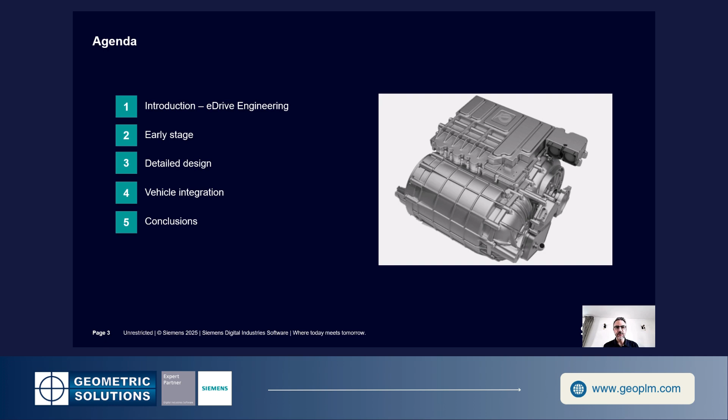Let's start with an introduction. Looking at the high-level challenges of eDrive engineering, NVH comes as one of the first points. Electric drives are not silent and have very specific noise characteristics, higher frequencies due to the construction of the electric motor and the transmission, tonal content, and phenomena such as the switching frequencies from the inverter can be very annoying, despite the fact that the overall levels of the e-powertrain are limited compared to traditional powertrains.

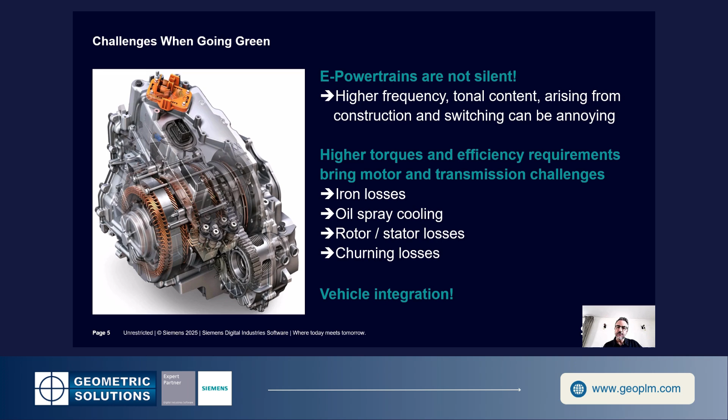Of course, there is a lot of other challenges in terms of performance and in terms of thermal management, how to deal with all the losses. And of course, vehicle integration is also very important. We would like in this webinar to go beyond just NVH, but also show how can we deal with NVH, considering also the other attributes like performance and thermal. How do we manage the need to deal with all these attributes?

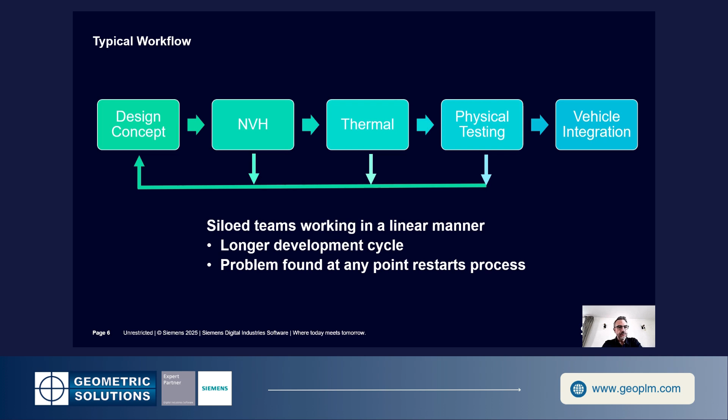Looking at the traditional development process, what we still see a lot in companies is the trend to have siloed teams, separated teams dealing with the different attributes of the vehicle, dealing with NVH, dealing with thermal, dealing with physical testing and with vehicle integration. That is not ideal because it leads to a longer development cycle, and also the fact that we solve an issue for one attribute can create a problem on another attribute if not done carefully, and this all leads to a lot more iterations in the design.

What we propose here is an integrated development process or workflow, which allows to deal with all of these attributes together. The idea is to keep consistency through the development cycle between these attributes, have the ability to assess each of these performances as early as possible, and allow teams to work in parallel and together, shortening the development cycle overall. This is what we refer to as multi-attribute balancing.

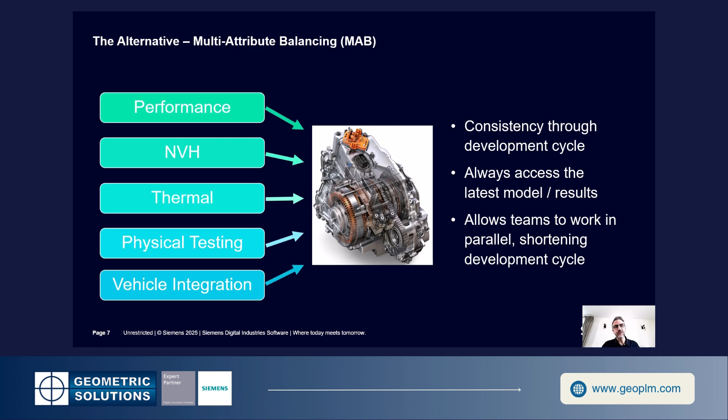And then the integration and the control validation, the V&V steps. What we see above is more the eDrive design process, the product lifecycle management aspect, how do we define the requirements and how do we develop the eDrive system by looking at all these attributes and also integrate it with the requirements that we can track along the development cycle until the final verification and validation of the product.

So this offers a framework in which the simulation and testing activities are well integrated with the product design, and we can leverage simulation and testing as much as possible along the development cycle. We will use this framework to go through the eDrive NVH development journey.

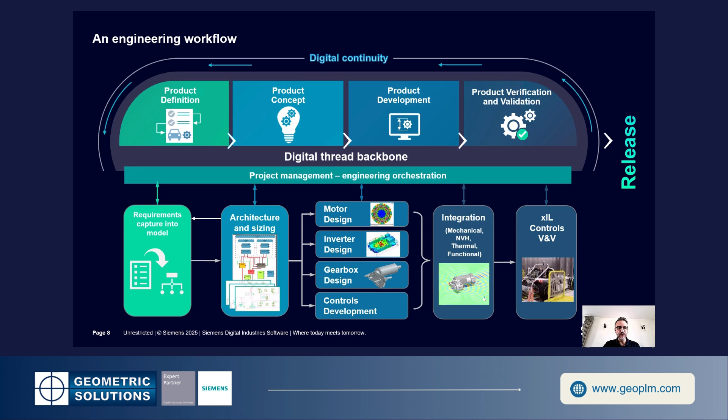But first, let's look at the main challenges a little bit more into detail. The challenge of the NVH engineer. Overall levels are lower, but as discussed before, we have these high frequency signals due to the e-motor construction or the transmission and the gear interactions.

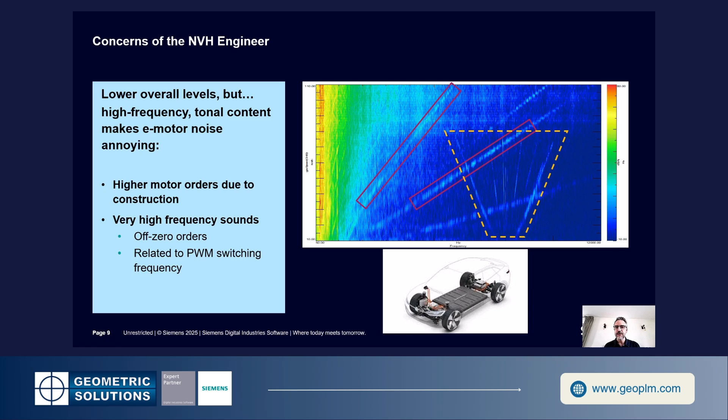And we have also quite specific phenomena like this switching noise from the inverter, which leads to off-zero orders, like we can see here. So very specific noise phenomena, which are also very annoying because it's about high frequencies and very specific signatures. So although we have lower overall level, we have to deal with these phenomena, and we have to make sure that these noise signatures stay below, let's say, the level of road noise or aerodynamic noises.

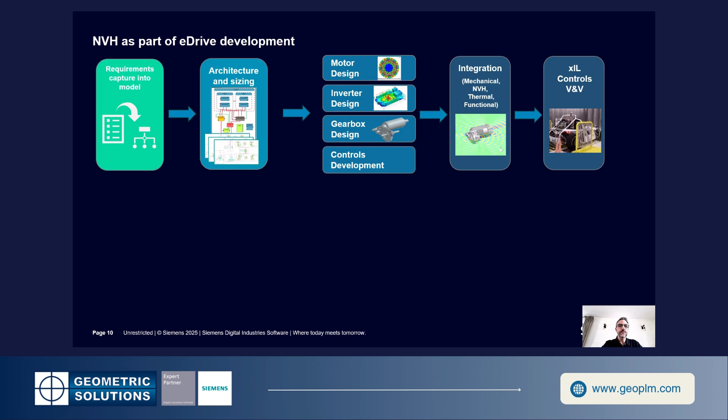If we look in more detail into the development cycle, we go through different phases, looking in particular at NVH. First, the requirements need to be defined at the vehicle level in terms of NVH. This can be done by looking at predecessor vehicles, by competitor benchmarking, activities which we also do in our engineering services team.

Starting from that, we go through the concept definition of the electric drive. At the concept stage, we define the architecture of the system, the transmission layout, the type of e-motor and construction. So already in that early phase, we can perform some NVH analysis in order to understand the impact of design decisions on NVH.

In the detailed design stage, for each component - the e-motor, the inverter, the gearbox - we do more and more detailed predictions as more details on the construction become available. So we can start optimizing the NVH while keeping performance and thermal on target.

For the gears, especially the gear geometry and microgeometry are being defined, and we are also looking at the gearbox housing, how to make sure that it is not going to create a high noise level or amplify the excitations into high noise levels.

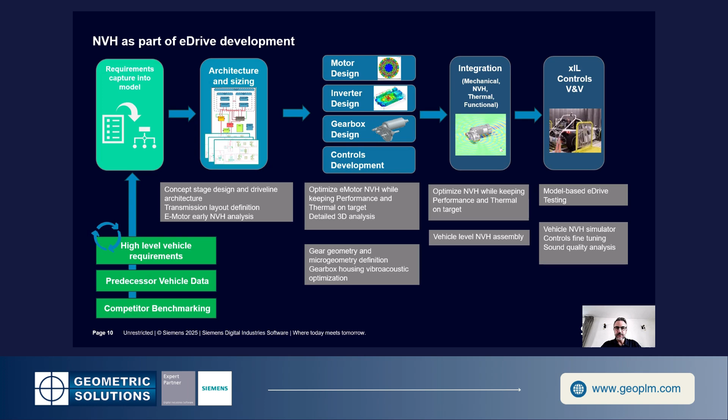So let's start looking at the simulation in early stage, in particular for the electric motor. What we propose here is a systems engineering approach, but for the NVH performance.

The electric machine noise and vibration app, which we call the eNoise app, is an application within our systems engineering software Simcenter Amesim, which deals with the NVH performance of the electric drive. It allows, in a systems engineering environment, to create a model of the e-drive and to integrate there also its vibroacoustic performance.

Typically in the early design stage, we don't have much detail about the construction. Maybe we have the type of motor, a first idea of the geometry, the number of poles, and the basic design of the electric machine.

This will allow us to predict the electromagnetic loads, or the B fields, in the air gaps. We then use some basic assumptions about the structural parameters of the electric machine in order to predict the noise radiated from these electromagnetic excitations.

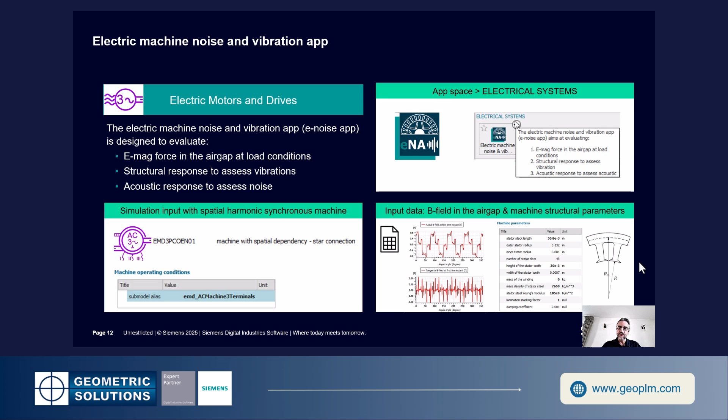The process looks like this. First, we have a pre-processing step where we create what we call reduced order models, typically using 2D electromagnetic FE simulation. We create maps of these B fields, or magnetic fields, in the air gaps under different conditions, with different torques, for instance.

This is the data which we use as input to our systems engineering software and simulation. We use these loads and combine them with our analytical, structural, and acoustic models in order to come up with order cuts with system level NVH predictions.

There is a possibility to replace the analytical model by a more detailed FE model. This is what we call vibration synthesis, which is typically only possible in later stages of the development. We'll come back to that later in the presentation.

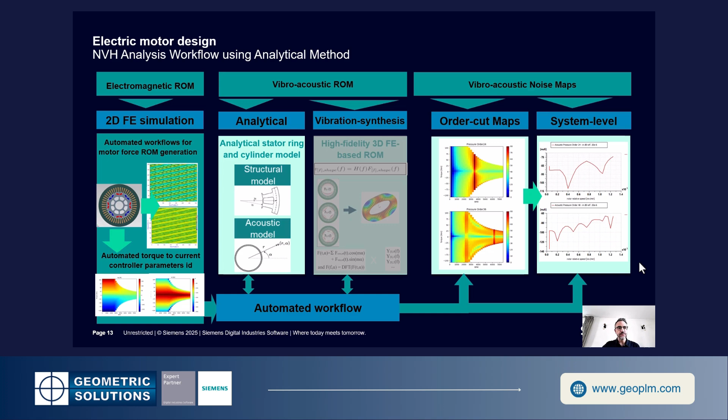An example here: we use this system simulation capability to evaluate the effect of controls on NVH, in particular for the pulse width modulation, the switching noise frequency from the inverter. We have our inverter model here, the controls defined as an input, and this is all integrated in a full vehicle model, a basic full vehicle model.

Here we see, for instance, an A to B comparison about the impact of control strategy on the NVH. Basically, we try to spread the frequency content of the excitation and avoid pure tonal excitations. Through this method, we see that we managed to reduce the peaks in the response, which is very positive.

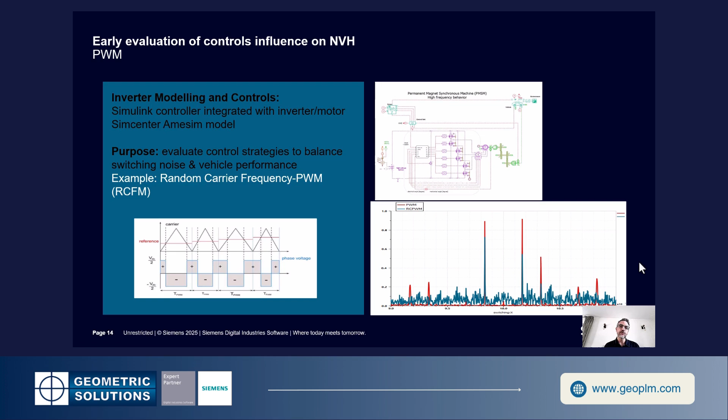But on the other hand, we also see that the background is more important - we have an excitation across the frequency range, which leads to this background noise. So the message we want to give is that it is possible, in early stage, to already assess the impact of the control strategy on the NVH.

Now we will discuss the transmission part, and Jonas will go through this simulation capability on the early stage for transmission.

Yes, thank you Francois. So I'll talk about NVH performance engineering in early stage, focused on the transmission. Before I do, I want to take a step back and first talk about the typical challenges we see in the area of transmission engineering.

First of all, NVH engineering has a limited influence on design. Typically NVH performance prediction and validation is done later in the development cycle, which means engineers only have design responsibility on housing geometry, bearings, or gear micro geometry. But if you would like to optimize NVH performance, you typically also need to change the transmission design itself.

Secondly, we know that system compliance will have a big impact on gear contact detection and therefore also on NVH performance. So how do we consider that coupled effect between the gear contact detection and the full transmission system level effects?

Also, when optimizing transmissions for best NVH performance, it will affect strength and durability performance attributes, so you need to make sure that once you optimize your transmission, it also meets these other performance attributes. Finally, you would like to optimize transmissions for driving at slow speeds in city environments and at high speeds on the highway, meaning you need to optimize your transmission for a broad range of operating conditions.

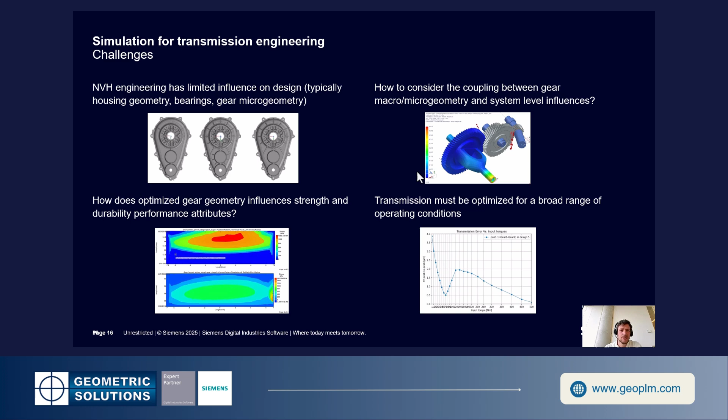So what is the traditional process we see today for transmission engineering, especially early in the concept stage? Typically you start from your transmission requirements, which can be the desired gear ratio, the desired power conditions, and the available space, and then you optimize the transmission for certain targets on durability, strength, efficiency, and NVH.

The first step is optimizing the layout, meaning optimizing the positions of the shafts, gears, bearings, and their corresponding dimensions. Once you have your layout fixed, you go into bearing selection, bearing optimization, and bearing rating. Then finally, similar for gears, you start to optimize both macro and micro geometry and evaluate the different performance metrics.

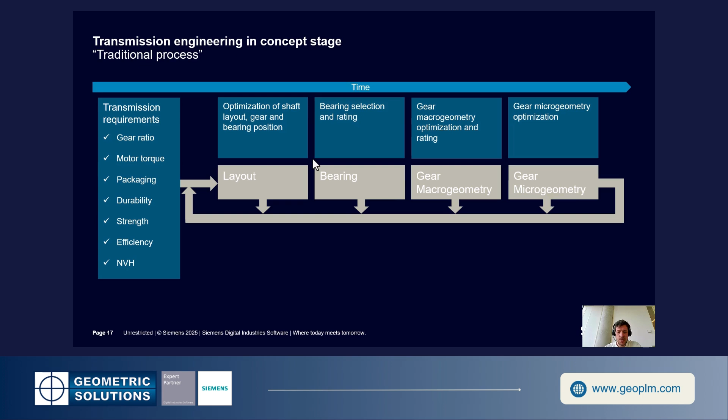But as you can see from this process, it requires many iterations and optimizations, typically at subsystem level, which means it's not only a very intensive manual approach but also very time consuming. Even more importantly, if you optimize at the subsystem level, it doesn't necessarily mean that you find the overall optimum design.

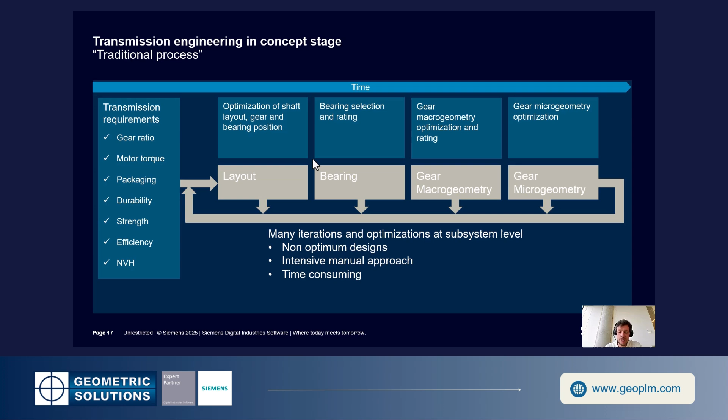That is why with SimCenter tools we would like to propose an alternative approach, where you also start from your layout and bearing optimization, but then use a systematic approach to optimize both gear macro and micro geometry at the same time. The advantage is that you have a systematic or automated approach to find the global optimum design, while considering your full transmission system level behavior.

Again, it's important that you take into account the influence of the transmission and housing compliance on the gear contact detection when optimizing your gear geometry.

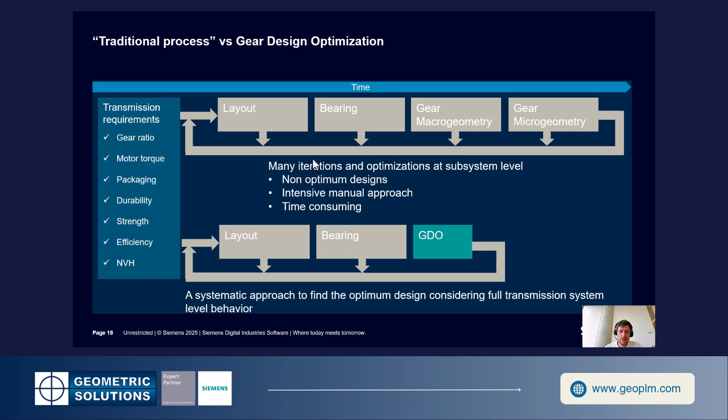So our colleagues from the services organization also developed a process to perform this layout optimization using SimCenter tools, more specifically SimCenter HEEDS and SimCenter 3D Motion. Here the target is to optimize your layout or topology for minimized mass and minimized misalignment variability.

Why misalignment variability? Because it's a good indicator or strategy for later optimizing the microgeometry. If you minimize the variation of misalignment as a function of torque, it typically also means you can optimize your microgeometry across a wide range of torque conditions.

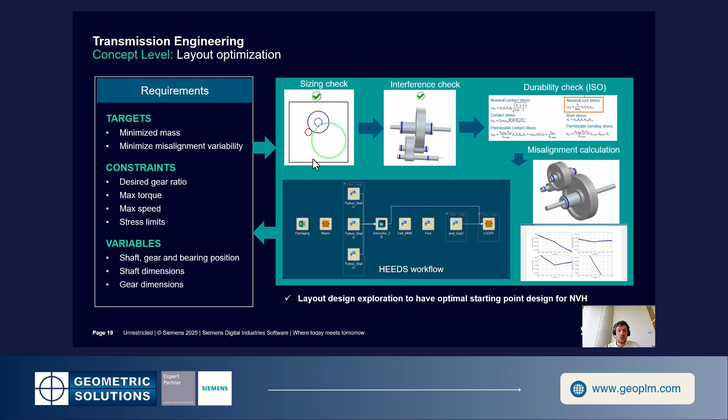What is the input? Typically your gear requirements, like gear ratio, max torque, max speed, and also constraints on stress, etc. What is the outcome, or what are the variables? It's the design parameters related to positioning and layout optimization—the shaft, gear, and bearing positions together with the shaft and gear dimensions. So a good layout is basically the starting point for a good transmission NVH optimization.

I've already talked about gear design optimization. It's really a framework leveraging SimCenter 3D motion and SimCenter HEEDS to optimize gear macro and microgeometry in terms of different KPIs, such as durability, efficiency, and NVH.

The key here is that you really consider a sophisticated optimization algorithm to optimize your transmission within a minimum evaluation time. Why is this important? For example, let's consider a two-stage lay shaft transmission, which is very common for EV passenger cars today. If you only consider those two gear pairs, we're already talking about more than 100 design parameters. So if you would like to find an optimum design for such a large design space, you really need a robust, efficient algorithm to find that optimum design within a minimum evaluation time.

Also very important is that when you optimize your gear macro and microgeometry, you consider those system level influences. What is the influence of the compliance, the deflection, and therefore misalignment on your gear contact behavior? And secondly, you would also like to consider multiple operating conditions, which typically means multi-torque conditions.

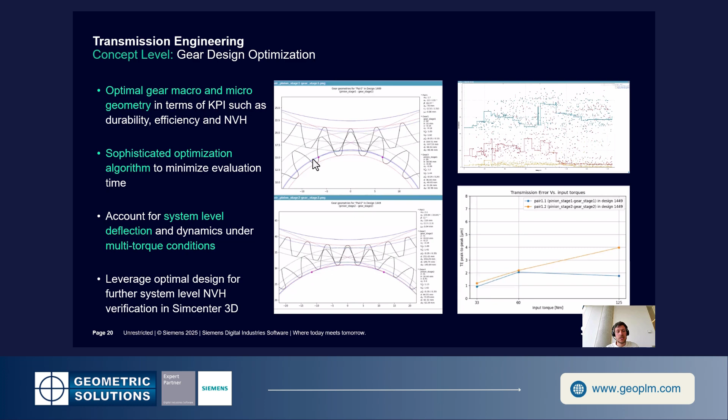So what does the typical process look like when we talk about gear design optimization? Targets are more NVH-focused, where we would like to minimize your peak-to-peak transmission error, for example, or minimize your bearing force harmonics. The input is typically that layout optimized from that first part, and then constraints on max torque, max speed, and constraints on stress, strength, and durability.

The variables here are really your gear macro and microgeometry variables. So, of course, the goal is to optimize the gear geometry for best NVH performance, but at the same time making sure you also meet criteria on root stress, contact stresses, flash temperatures - the strength, durability, and efficiency type of KPIs.

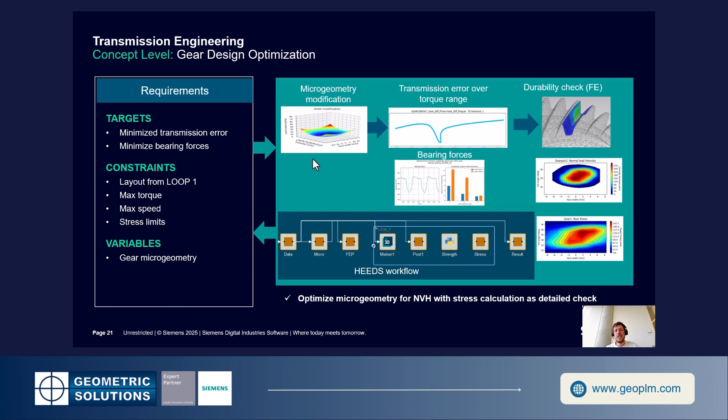And with that, I'll give the word back to Francois. Thank you, Jonas. Let's now get back to our agenda.

We are going now to focus on the detailed design phase. In this phase, we are able to do much more detailed simulations in order to understand the NVH performance of the electric motor, the inverter, and the gearbox in much more detail, and also continue assessing the effect from controls.

The key will be to optimize the e-motor NVH while keeping performance and thermal on target, in our effort to ensure multi-attribute balancing. We will also go into more detail in the definition of gear geometry and microgeometry, and start optimizing the housing of the gearbox.

So the process for a detailed analysis of e-motor NVH looks as follows. In the first step, we need to identify the loads by means of a 2D or 3D electromagnetic FE model. We will characterize the magnetic field and the loads which are applied to the stator of the e-motor.

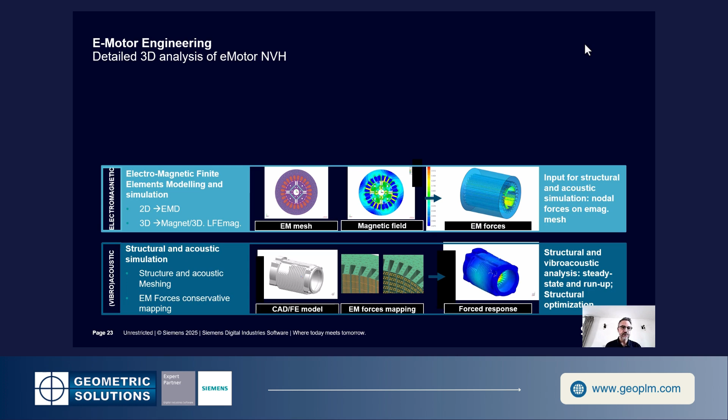In addition to that, it remains possible to understand the effect from controls on the NVH performance. In this example, we are using an AMESim system level model of the e-motor, in which we can input different inverter current waveforms as input for the electromagnetic simulation. So we are closing the loop with the controls.

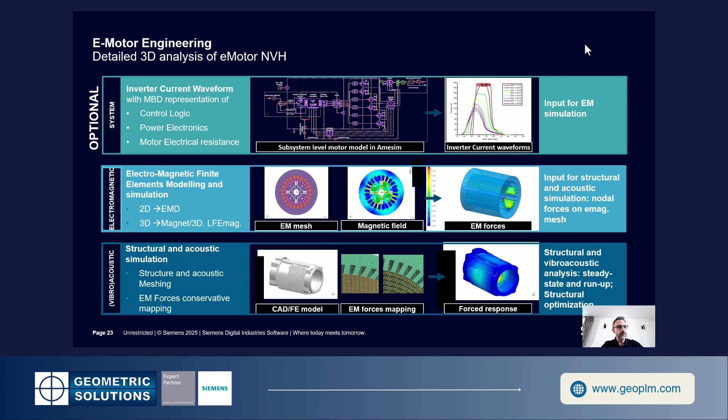Besides these very detailed calculations, one of the difficulties to deal with is calculation time, because we are talking about quite large models.

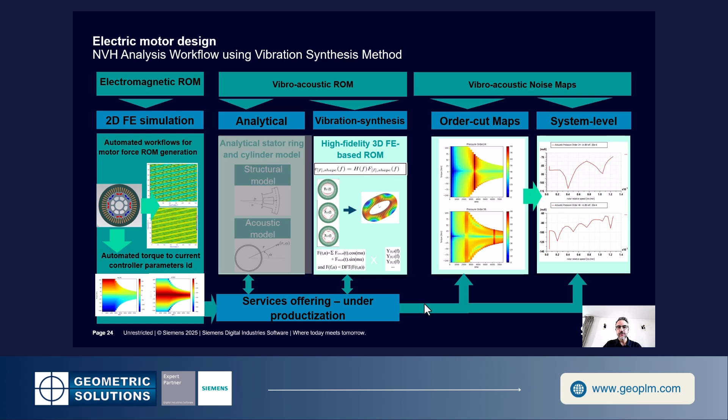In this case, we can propose our eNoise app as a solution, in particular the so-called vibration synthesis method. In this method, we reduce the FE representation of the structure by means of a reduced order model, allowing much faster predictions. We first need to pre-process the information to identify basic mode shapes from the e-motor structure, then calculate the response as a superposition of these basic mode shapes. This allows us to use the same approach described before with a more realistic representation of the structure instead of an analytical model. This is currently an option offered by our services, and coming up in our Simcenter 3D product.

Here are some other considerations. The eDrive engineer will look for options to optimize performance, and for instance, skewing of the e-motor or notching strategies can be used to optimize performance, but they also have an impact on NVH. So these are important parameters to take into account.

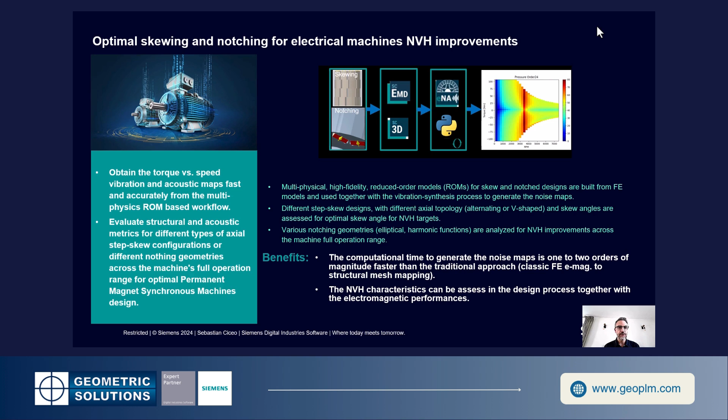In this overview, we show the possibility to evaluate the effect of skewing or notching strategies on NVH performance by using our eNoise app. This allows a quite fast prediction and understanding of the impact of skewing and notching, and we're able to assess not only how they affect performance, but also how they affect the NVH of the e-motor.

Now, still looking at the need to come up with a well-balanced design, which will lead to good performance from a thermal viewpoint, a durability viewpoint, and an NVH viewpoint, this is an example of a workflow we can propose to do this optimization and properly take into account the different attributes. Our engineering services team supports customers to implement and deploy our Simcenter simulation solutions into a workflow suited to the customer's organization or process.

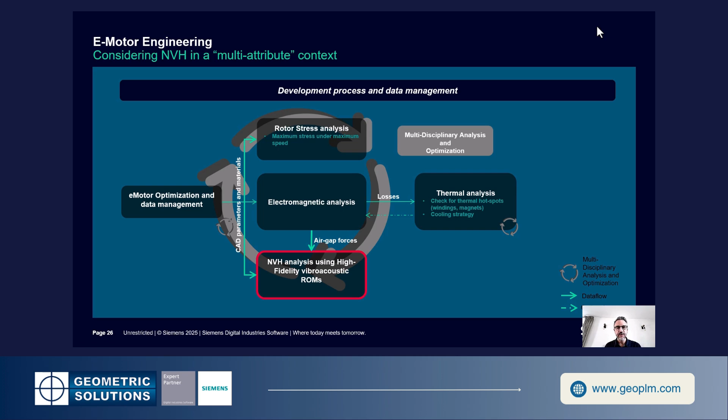In this case, for instance, assessing the electromagnetic performance, calculating the NVH, assessing the rotor stress, and then checking the thermal performance, iterating through this process until we come up with a balanced design. So here, the key is multidisciplinary analysis and optimization. We are using, for instance, HEEDS as an optimizer to realize this workflow.

Looking at transmission NVH, also in this detailed design stage, we can look much more in detail at the impact of the construction on NVH. For instance, we can capture the coupling between system level dynamics and the deformation on the shaft on the gear contact. We're able to consider the influence of damping.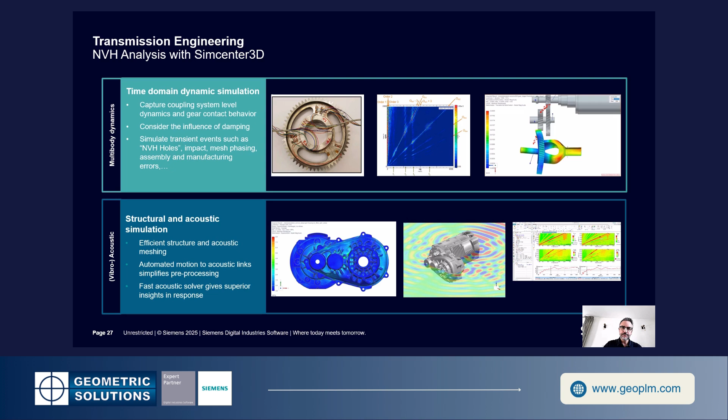Let's now go to the last part of the webinar, where we will discuss integration issues, still looking at NVH as one of the performances to manage. We'll look into performance at the vehicle level, and also introduce some more testing capabilities, including model-based e-drive testing, and how we can implement these in a simulator.

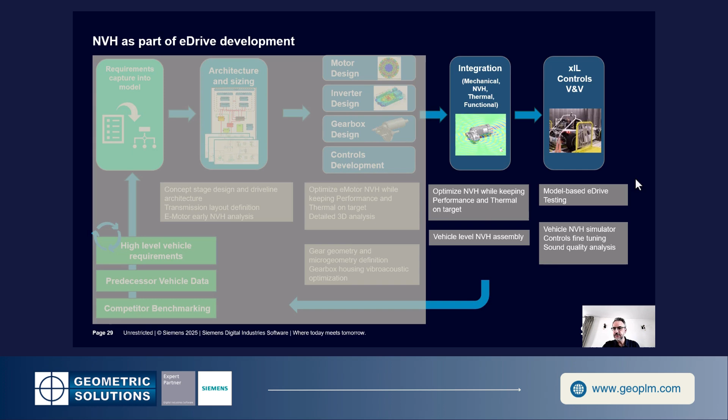The idea of analyzing the integration of the eDrive in the vehicle is the following: we use the source transfer receiver model. The idea is that at each stage of development, whether you are an OEM or supplier, you can have a view about the full vehicle performance. The source representation as well as the transfer in the vehicle can both be represented either by testing or by simulation, and then the system allows us to understand the response at vehicle level.

There are a few technological considerations, in particular on how to represent the source and in which boundary conditions, in order to avoid evaluating the source with different boundary conditions than in the vehicle, which would give an incorrect response. For that, we use blocked forces, which allow an invariant representation of the excitation, and then combine it with the transfer function at the vehicle level.

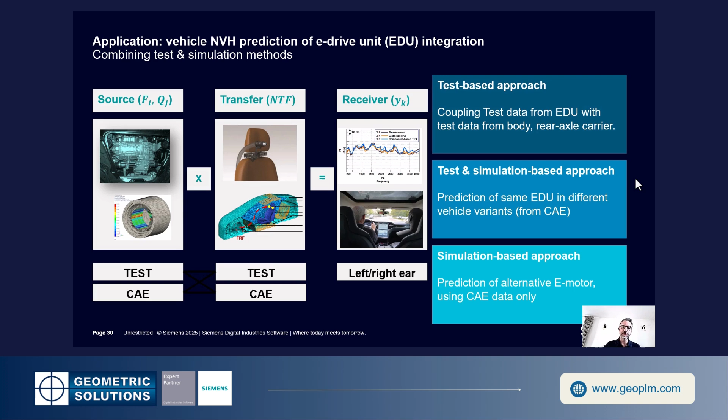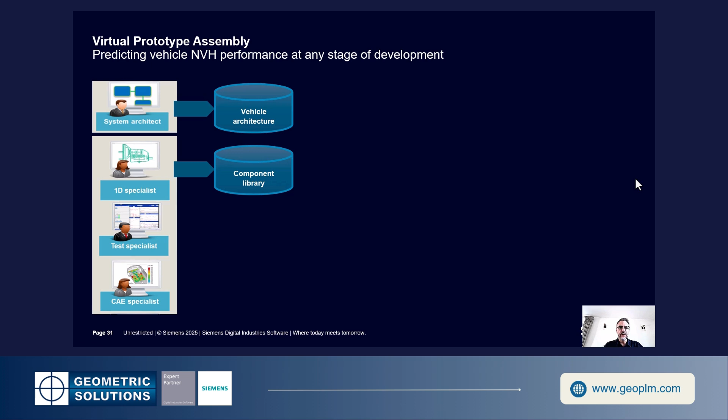This approach is available in our virtual prototype assembly tool. The idea of virtual prototype assembly is to put the different parts of the organization together in order to have the right data to be able to predict the NVH performance, and that also includes collaboration with the suppliers.

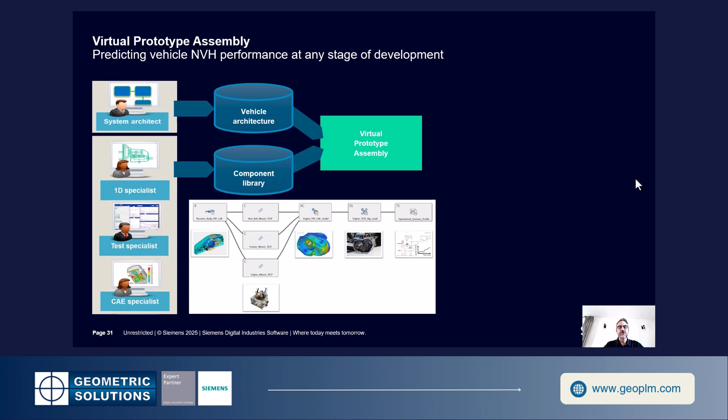The specialists will create a library of components which are integrated in the vehicle, and the assembly is done in the virtual prototype assembly, or VPA, tool in Simcenter Testlab, which can then be used by analysts to analyze the response, to analyze the contributions, to assess sound quality, but also this data can be used inside NVH simulator to assess the effect of control strategy.

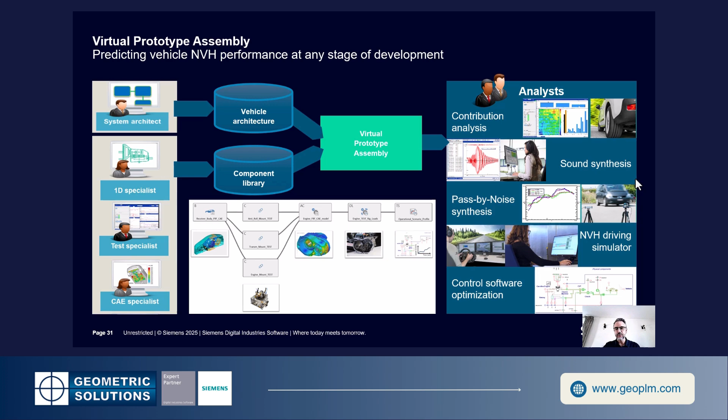Here you find some examples of typical data sources in order to populate this virtual prototype assembly. We will define accurate components, using a library of components from simulation and/or from testing. For instance, Testlab data, SimCenter 3D, Simcenter Amesim can be used, as well as external data from other software.

Once these component models are created, they are selected for the specific architecture, and then the assembly is done and we can post-process the results.

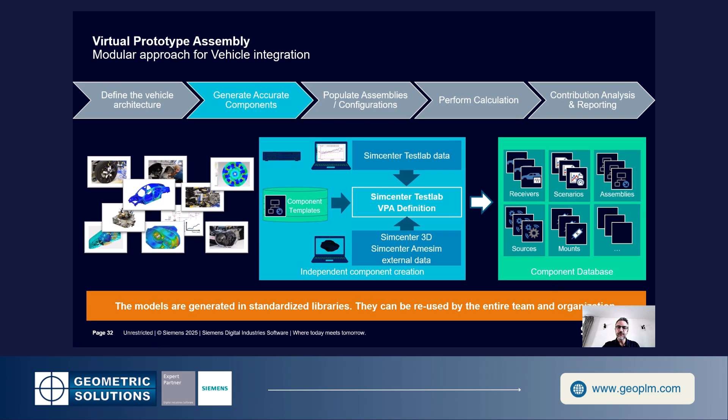We haven't talked a lot about testing so far, although testing is of course always considered and always very important along the full development cycle. So what we see here is a real intelligent testing setup, or model-based NVH testing, of an electric drive.

You can see here above the eDrive itself, the physical eDrive, which is driven by a motor, and below you have a real-time computer which has a real-time model of the vehicle running. The idea is that with this we are able to represent real driving scenarios and to test the NVH of the gearbox along with realistic loading conditions and scenarios.

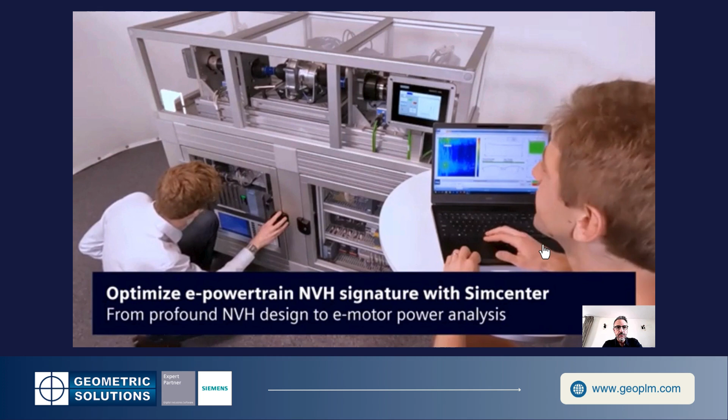So you can listen to the noise here. See the real-time computer with the Amesim model running in real time.

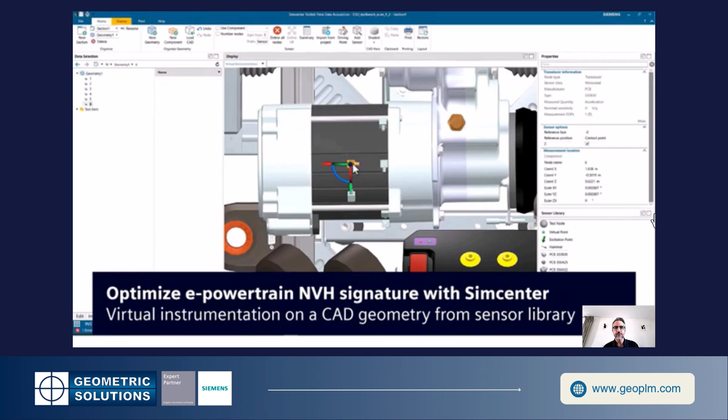Here we are instrumenting based on CAD, defining the instrumentation, and then processing the data. So here we can illustrate the multiple possibilities within Testlab to process the measured data, look at color maps, look at time data, and use different post-processing capabilities in order to understand some NVH phenomena, such as operational deflection shapes, for instance.

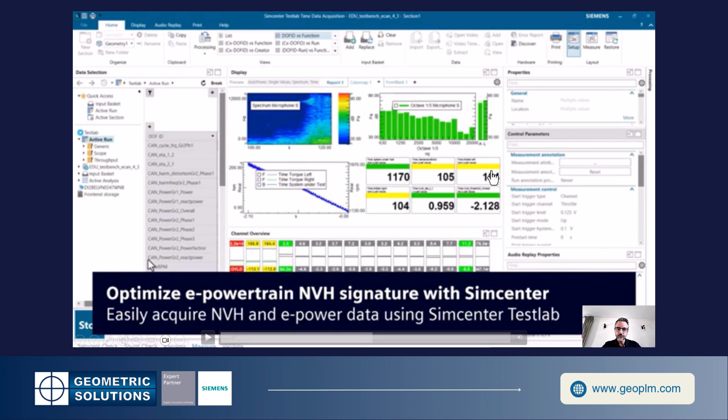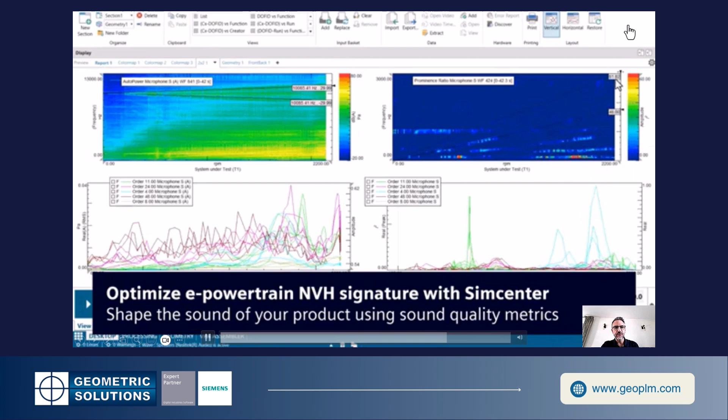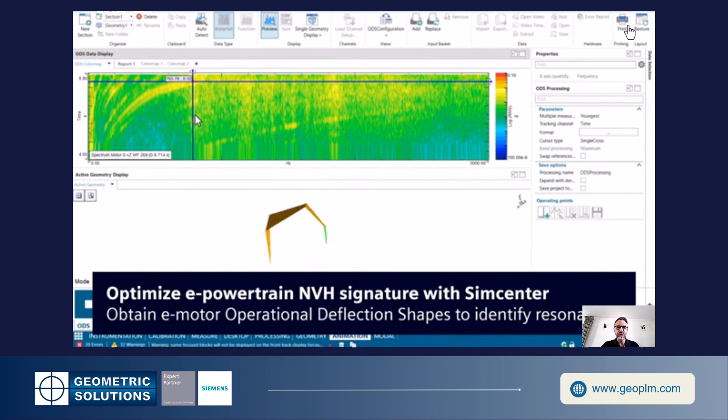So you can see the Testlab environment, the various post-processing capabilities, to present all data as needed. We can also analyze the operational deflection shapes in order to better understand specific noise phenomena.

Looking now into the final stages of the development, here is a very nice example and reference with the Hyundai motor, applying our simulation technology in order to evaluate some strategies to reduce the noise level. The strategies are linked with the inverter control.

Here we are injecting some harmonic in the input current in order to reduce the NVH response. So this strategy is evaluated by using the eNoise app in order to come up with a very fast prediction, so to really optimize the strategy.

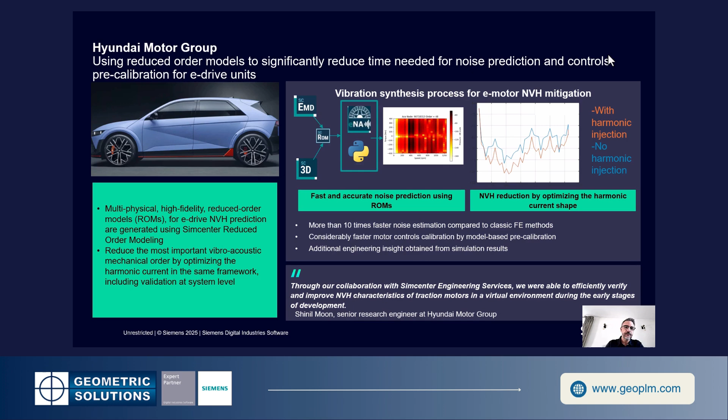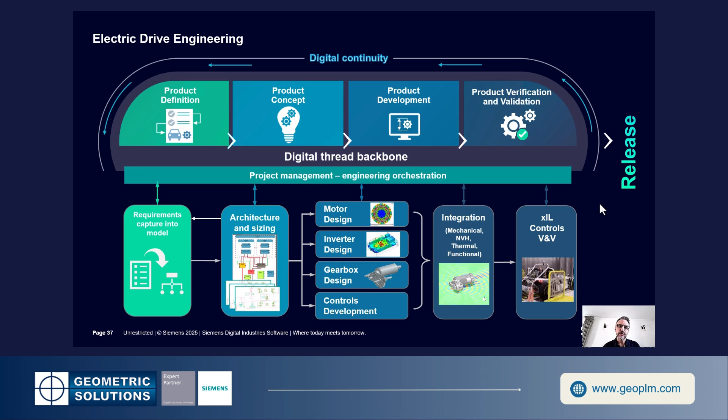We now come to the conclusion of this webinar, and for this I would like to come back to the initial representation of the different stages of development, which allows us to highlight how we deal with NVH, our simulation and testing solutions for NVH, but also looking at multi-attribute balancing, and how this is integrated into the product development process, such that requirements defined early on in the program can be followed up through the program, and we can check the performance predicted first by simulation, then by testing, or a combination of simulation and testing, and compare that with the requirements to make sure we are on track for the program.

Our engineering services are available to support you using our product. We can propose dedicated services in order to make sure that you leverage the Simcenter product and create workflows which are fit to your needs.